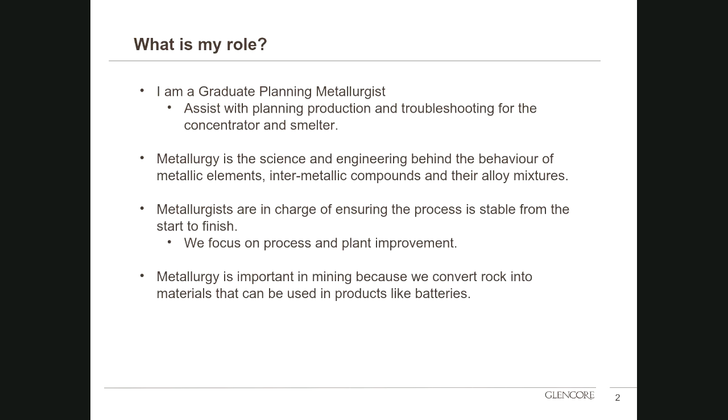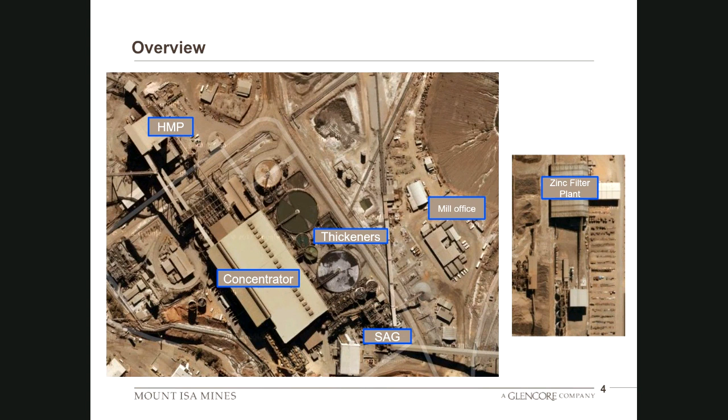So just to give you a simple overview of our flow chart, you have the mine, it crushes the material, it then goes into a sag mill. So this is material that's about 17 centimeters. That's then crushed down to a very fine size, about 2 centimeters. This then goes into another mill, essentially, which goes down even further to about 100 micron.

Now, as a rule of thumb, the human hair is about 35 to about 75 micron. So you want to get your mineral to the size of basically 2 human hairs. And the reason being is because it makes it easier for those physical chemical reactions to take place. And that's where you go into your flotation. That's where you get your separation going. And then you have further separation with your cleaning, and then you go into your thickeners where you recover your water. And I'll explain those in a sec.

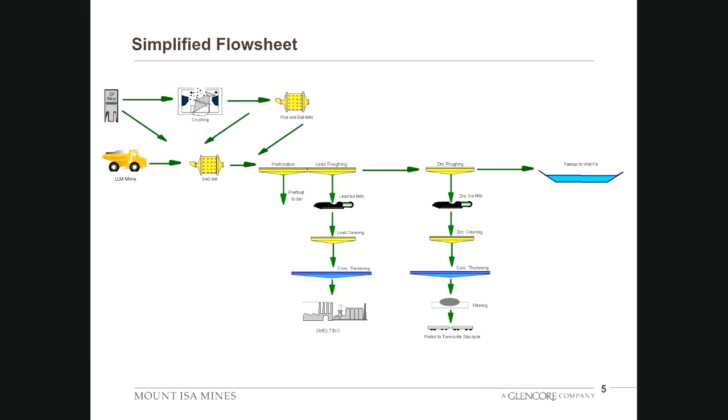So this is your sag mill. Like I said, rock comes in about 17 centimeters. You basically grind it down to 2 centimeters. And then you go into your rod mill and you grind it from about 2 centimeters into about 100 micron. So rod and ball mills. This is a ball mill, this is a rod mill, and they're basically like big washing machines with ball media inside. So if you imagine like a shot put ball, that goes into your ball mill and it just grinds it all down.

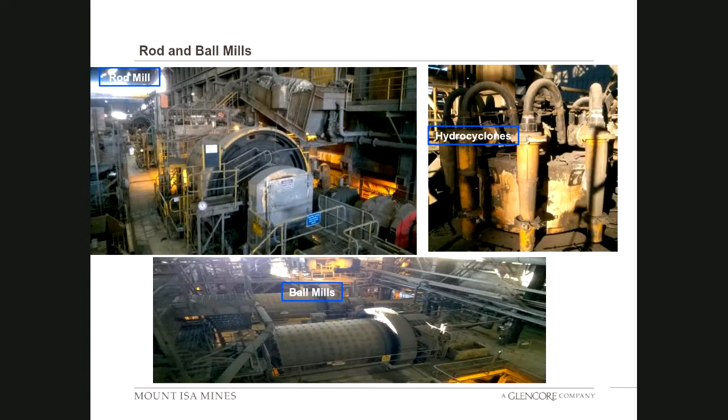So flotation, this is basically the essence of concentrator metallurgy. This is where all the chemistry comes into play, and this is where you get to see those fun reactions take place. So to imagine flotation simply, I like to use the analogy of you've got a glass of milk, you've got a straw, and you've got a piece of dirt. And the aim of the game is trying to get that piece of dirt back up to the top.

So if you blow into the straw, you create bubbles essentially in your milk. But you want to get that dirt out of the milk. So if you blow hard enough, that dirt, which is a fine size, should actually adhere to the bubble and should blow over and then go over the top. And that's in essence what flotation is.

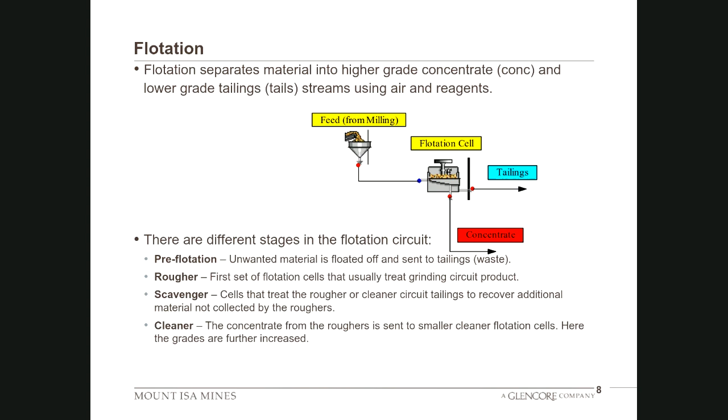You're trying to separate your valuable metal, so in this case our zinc, by using chemical reactions, or a series of reagents, and then activating it with basically collector and frother, and then using air to separate it. So often you've got pre-flotation, rougher flotation, scavenger, and cleaner flotation. And I'll explain those a bit more. So this is what your circuits look like, and this is what your concentrate, so your overflow, looks like, the bubbles that have been collected with your metal on top.

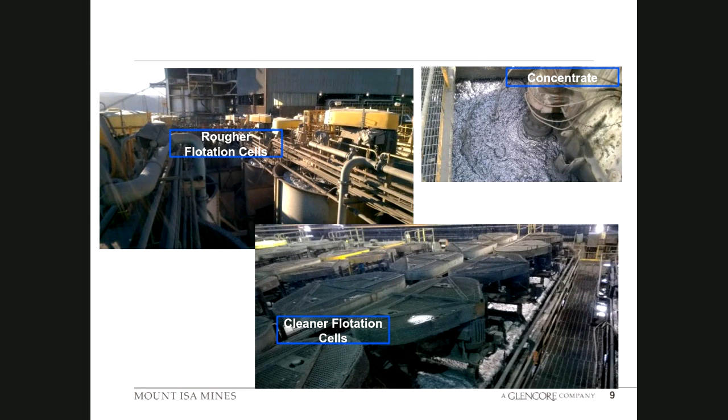You then add frother, kind of like a bubble mixture, and you essentially have made that metal hydrophobic, which then is inclined to basically release or be removed from the mixture. Now you add things like naphthalene sulfonate to basically depress or disperse the molecules so they're not evenly tied together, and you add copper sulfate to activate the zinc metals.

What that does is basically pretend it's a copper metal. The reason being is because copper metals float far more readily than zinc metals. So it's kind of like the chemistry thinks, oh, that's a copper mineral. I'll float that because that's easier to float than zinc.

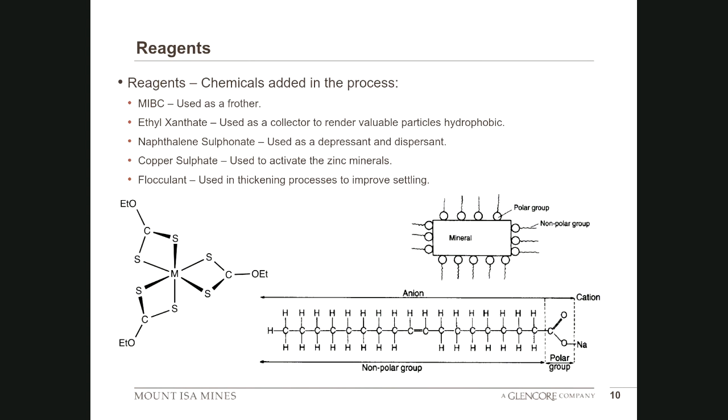When you add your collector to your mineral, you've got a non-polar group, which makes it hydrophobic, but you've got this polar group, which attaches around to it. And I believe there was a famous video circulating during the early days of COVID-19 where students would put a little bit of detergent on their finger and put it into a mixture where there was dirt, and the dirt would just separate to the end. That's pretty much what you're doing. That metal is kind of dirt, but this time imagine it attaching to the dirt or to the metal and proposing it in a certain direction. And that's essentially what you want.

So after you have recovered your metal, you send it to the thickener, which then densifies your solution, your slurry, where your underflow is about 75% solids, so the other 25% is liquid. You then go to a filter plant, and then you recover most of your liquid, and then you filter it, and it comes out as concentrate.

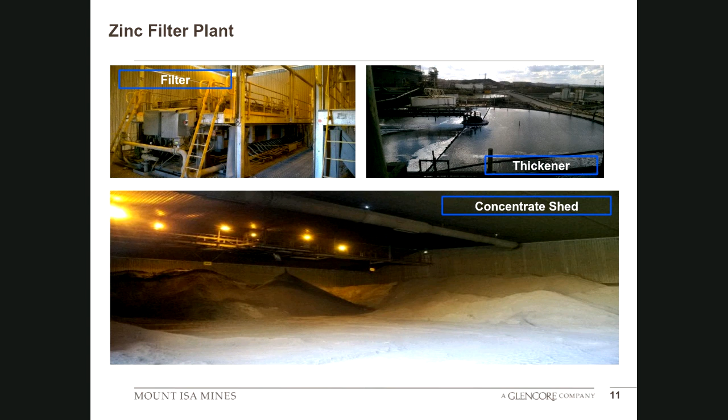So to just give a perspective of what exactly we produce on a day-to-day basis or each year, we mill about 4 million tons of material. We recover about 325,000 tons of zinc, 155,000 tons of lead, and 170,000 kilograms of silver.

So what we rail to Townsville is about 650,000 tons, and every year what we feed is roughly the volume of the Melbourne Cricket Ground. So if you've ever been to the Boxing Day test match, or you've watched the cricket, basically we feed the entire volume of Australia's largest cricket ground every single year.

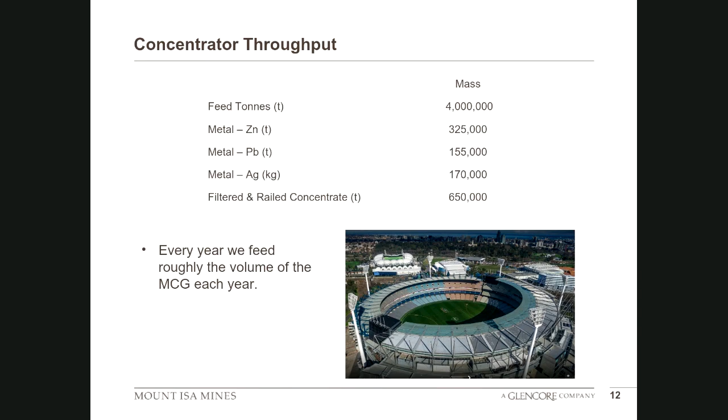So this is more of my bread and butter. This is the smelter operations, and this is more of the chemistry that I get involved in. So with your lead smelter, you've got 4 major areas. You've got your feed preparation, where you've got the concentrate from the concentrator. You basically filter it, it becomes a bit of a cake with high moisture associated with it, but that's okay. You need that to agglomerate the particles together. Then you've got your first reaction, your oxidation reaction. Then you've got your second reaction, your reduction reaction, and then you've got your semi-refining. So I'll just go through them quickly.

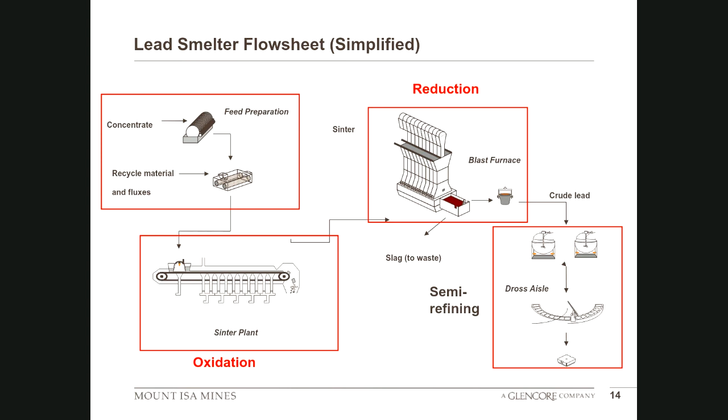So this is what your filter looks like. It's this drum filter where it sucks in all that moisture, but releases this cake. This cake then goes into the oxidation reaction, which is the sinter plant, where you supply oxygen plus a little bit of heat to get it going, and galena, or lead sulfide, and it produces lead oxide plus SO2 gas. And it's an exothermic reaction, so it releases more heat.

So really, only around this area is where you need to ignite it. So you ignite it, get it to about 600 degrees, and then it's self-sustaining. You need no more management whatsoever apart from your oxygen. Because with your chemistry, if you control one of your reactants, you basically control your overall reaction. Then at the end, once it goes off the tip end and gets crushed, we create this product called sinter, whose main reactant inside is lead oxide.

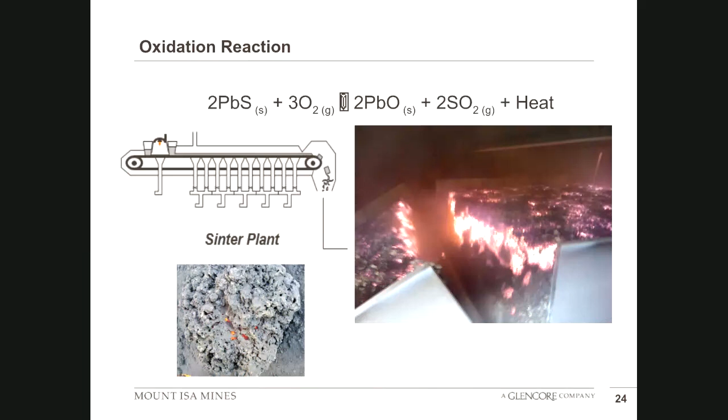So with your lead oxide, you feed it into the furnace, and what you create is lead metal on one side, so on this side, and you create slag on the other side. And slag is kind of like your impurities.

Sorry, Nathan. Yep. Do you mind just turning your pointer on, because we couldn't see which side you pointed to? I think it's just the little hand button at the top. I see. Can you guys see it now? I'm not sure if they can. I can't, but they might be able to now. Yep.

I'll probably do it like that. Probably the best way to do it. So this is your lead, and this is your slag. So to just explain the reduction reaction, essentially, your reduction reaction is where you use carbon monoxide plus lead oxide to create liquid lead.

And what happens is, imagine a chamber. In that chamber, you have certain layers or certain zones. In your top zone, you have your feed zone. That's where you add your feed material. In your second zone, you've got your reduction reaction, and that's where you have the lead oxide reacting with the carbon monoxide. Then in the middle zone, you have your fusion zone. That's where you have all the impurities in your lead oxide or in your sinter reacting to form slag. And then at the bottom, you have your combustion zone.

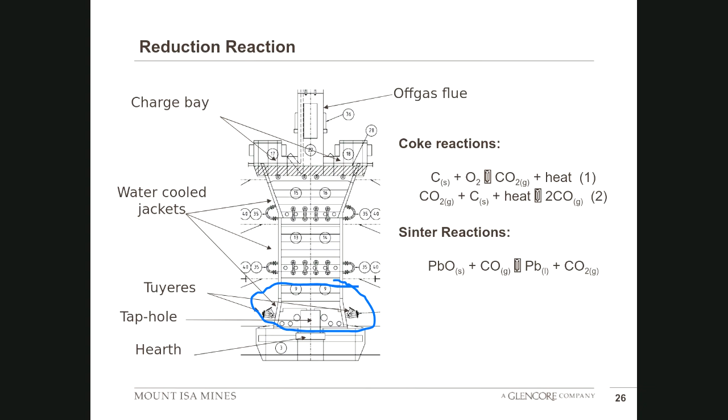So like olive oil and water, and then you separate them based on the height of those densities or the volumes in which those mixtures take place. Then what you do is some semi-refining, you upgrade it, and this adds a little bit of caustic, so sodium hydroxide, and then you create lead blocks from this product. And this is about 99.7% lead. This is then labelled and transported to BRM, so Britannia Refined Metals, in London. So we produce about 120,000 tonnes of it each year, and normally we treat about 245,000 tonnes of Isa concentrate. So yeah, that's in essence the presentation.

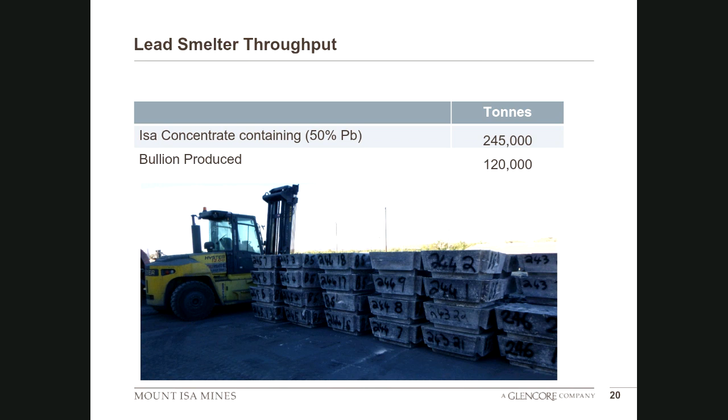That was amazing. I have learnt, honestly, so much. And I'm sure that the students are thinking the same. So while they're thinking of all the questions that they would like to ask, I've got a few. So the first thing I was wondering is, what was the pathway that you took to become a metallurgist? So what subjects did you do at school? Did you do at uni? That type of thing.

Yep. So when I started off in year 11, I had no idea what I wanted to do. What I did know is that I really liked maths and I really liked science. So I did your basic maths, I did chemistry, and I did physics as well. And I really enjoyed those subjects. After I completed my year 12 studies, I didn't know what I wanted to do, but I still liked those subjects and I wanted to do more of those. So I thought about different types of engineering. I thought about chemical engineering, and through my chemical engineering degree, I learned an appreciation for the different fields. And one of the fields that we learned about was metallurgy. It just so happened it aligned with my interests. And then I happened to get my dream job at the smelter, where I get to see reactions take place.

Yeah, cool. So I guess you've also kind of answered why you decided to become a metallurgist. So it was really that ongoing enjoyment of those subjects. It kind of led you to where you were meant to be, in a way. Yeah, exactly. Okay. So then, what's your favorite part of your job?